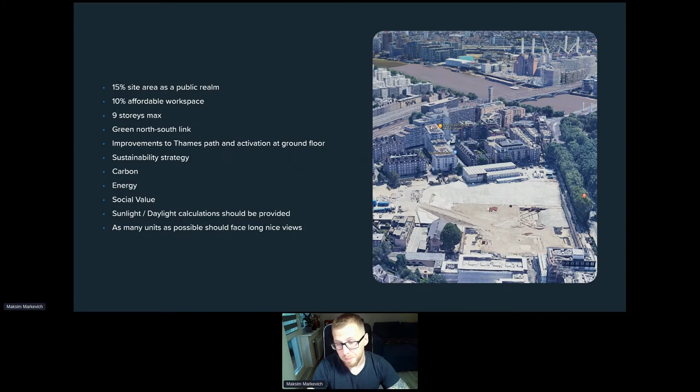The same example here. This is our site. 10% of the site should be affordable. It should be maximum 9 stories. Please build a strategy around social value, sustainability, etc.

Or the third example, again just a new site: please give us 325 residential units with this amount of net internal area. Net-to-gross efficiency should be more than 78%, no more than 5 units per core, etc. So this is how typical brief requirements for architects at the beginning of any project look like.

So here we're going to talk a little bit about what software they use right now to solve these problems. We've broken down this software into 3 different categories, and I'll explain what they are and the difference between them.

The first category is the most obvious one: building design and BIM modeling software, such as Revit, Rhino, ArchiCAD, SketchUp, etc. Everybody knows this kind of software, and the technology they usually use is manual modeling, parametric design, or simple CAD drawings.

Another category is building design automation software. It's not really new, but it's a relatively new software category which usually contains a combination - for example, Dynamo, which works on top of Revit, or Grasshopper, which works on top of Rhino. The technologies or workflows this kind of software uses include computational modeling, generative design, and other algorithms.

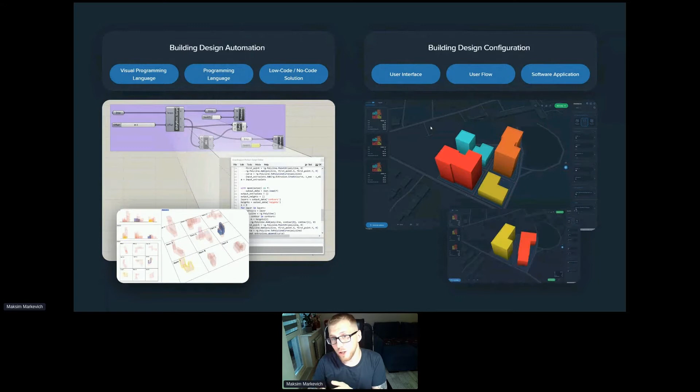Building design configuration software is not such low-level software. It usually has an interface, a specific user flow, and looks like web-based or desktop software where you don't have the flexibility you have in Grasshopper or Dynamo, but you can still do quite a lot of different things. This is the main difference.

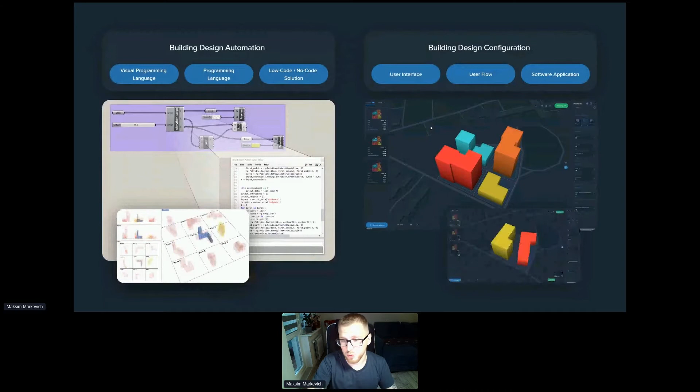And among building design configuration software, there are also quite a few different softwares, and they're really different by the context they cover, by the level of detail they provide, by the level of building informational level, etc. But we'll talk about it a little bit later.

Let's go further. So CREO Module, we will talk a little bit about vision. As you see and as you know already, it's a building design configuration software. So here are quite a few words about our vision.

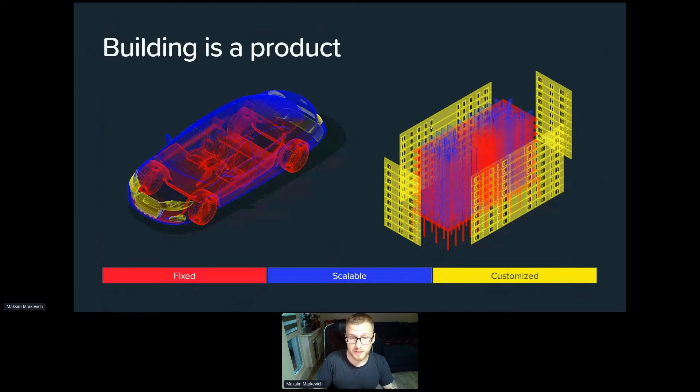We believe that every building should be treated as a product rather than a project. It's very similar to a car, and it also contains fixed, scalable, customized parts, especially if you're talking about different prefab solutions. Obviously the facade can be customized, let's say MEP systems can be scalable or fixed, frame can be fixed, etc.

But it's not like a car, and the main difference is that a building is more contextual than a car. There are quite a few different contexts - one is market context. For example, for a particular region you'll need to provide specific social units, or if the generation of people living in this area is pretty old, say 50-60 years, it will affect the quality and the size and configuration of units you provide for that region. This is what's called market context.

The second context is site context. It's about different setbacks, about listed buildings around your site, about flooding zones, maybe some tubes, maybe some specific conditions, etc.

The third context is planning context - it's about transport, pedestrian ways, sunlight and daylight calculations, etc. And the fourth one is building context - it's about how you stack these units, what building topology, what kit of parts you use, what kind of finishes, what facade materials you use, etc.

Obviously there are a lot of other contexts which are more connected to later stages of the project - for example, logistic context for the construction site, etc. But that will be important a little bit later.

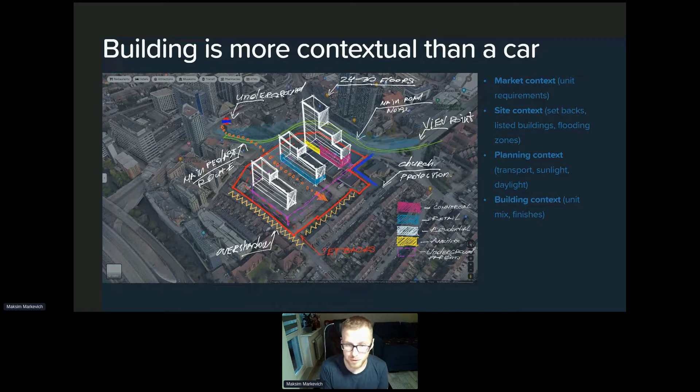So we focused on a building context, and here a little bit about how we define this building concept and the building topology - how we define the building DNA before we do automation of it. We basically divide building DNA into three main sections or three main components.

So the first component is topology - it's about spaces and adjacencies. For example, when you have a residential building, it's about units, corridors, lift halls, and how all these spaces are connected. When we talk about parking, it's about stalls, ramp space, drive aisle, etc. So it's a different topology, and inside residential buildings there can be hundreds, thousands, millions of different topologies.

The second part is design guidelines - how these spaces and adjacencies create the main function of the building. It's about different nuances, requirements to spans, requirements to fire safety rules, requirements to daylight and sunlight calculations, etc. And the third component is a kit of parts.

It's about walls, doors, windows. It can be different construction methods for the particular building. It can be volumetric modules or panelized systems, or it can be just components like usual columns, beams, or wooden frames, etc. So basically, for ourselves, we define that a building concept is defined by these three main things.

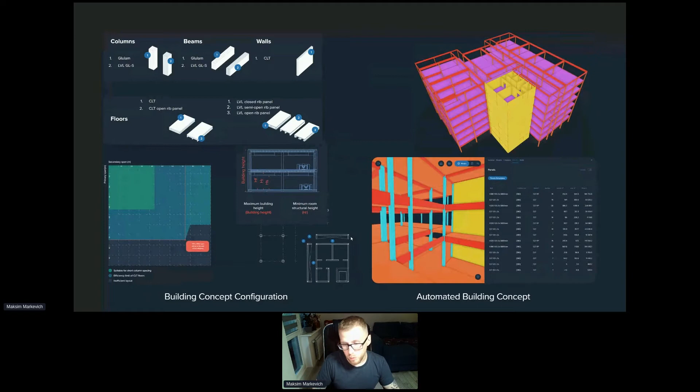So we build a flow which actually takes into account all these requirements, all these three components from the previous slide. And then such a building, like you see from the right side of my screen, can be generated in a few minutes with all materials, with all elements, with bill of quantities, really quickly. Okay, so this is the first example.

Another example is our volumetric modular residential buildings configurator. Same story - it's just kit of parts, modules, adjacencies and topologies about how these modules connect together into units. And it's not only about horizontal direction, it's also about vertical direction.

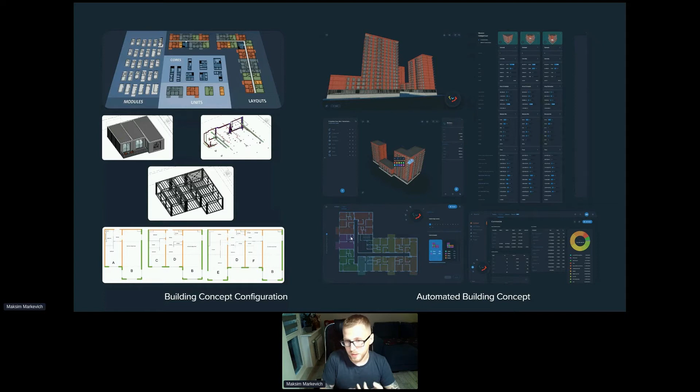As you see here, a module can contain not only an architectural part, but also MEP part, structural part, which basically means you cannot put any module on top of any module - you need to respect some rules. And the same story - so we choose this concept, we do automation, and then our users can generate 3D models with dashboards, analytics information, etc.

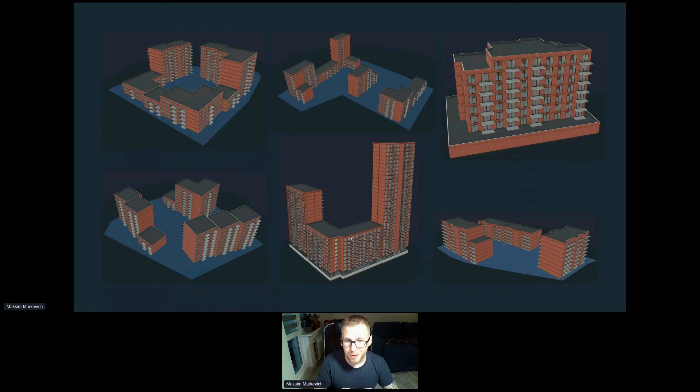So again, just a few more pictures to explain what building concept means. For example, all these buildings are entities of one building concept. But I mean, it looks like that - they all have different, they all have the same facades, quite similar configurations, but it's not only about facades.

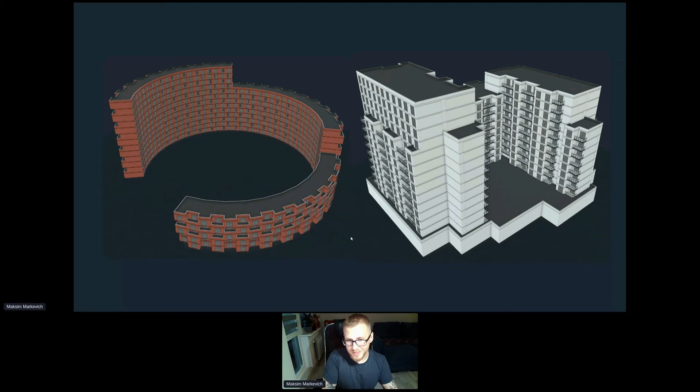One building concept can have completely different facades, completely different colors, completely different textures, different materials, if it was taken into account when it was created. So again, these building models are also models from one building concept. And one more point - it's even not only about the architectural part of the building, because building concept can also contain a structural or MEP part.

And also the last point, which is also very crucial, is about different inputs. So when a user generates a building, we for example can work in a way in which an architect can create masses - like a massing for the building - and then we fulfill this massing with the buildable parts, taking into account building concept definitions, topology, kit of parts, guidelines.

Also, recently we built a solution which allows us - we use the technology from our other product, DTakeoff - and we built a solution where users can upload a floor plan, like a PDF floor plan. We do recognition of this floor plan.

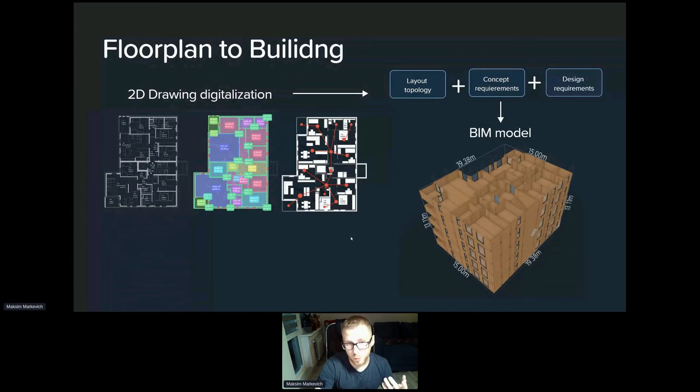We define spaces, we define units, we define corridors, and then we use specific kit of parts from one manufacturer, and we just fulfill this floor plan with this kit of parts. It changes the floor plan a bit, but still it makes perfect sense for our client. And it's just one example with a completely different input - so as you see here is just a massing to build in, and here is like a floor plan to build in.

Here's the main question: why do we need automation of building concepts? The answer is pretty simple, actually. We all know about the housing crisis, and we all know there are a lot of building types that just need to be built.

So it's not about unique and bizarre projects. It's about residential buildings or hospitals, which actually have pretty the same topology, pretty the same kit of parts, depending on the country, etc. Such building concepts sometimes need to be built much faster, and the best way to improve the design phase and pre-construction phase of the building is to define this building concept and to do automation of it.

The next question I want to emphasize is which building concepts we should automate. Obviously, all unique and bizarre projects should be kept as projects for architects, where they can spend more time doing nice calculations, planning, using their imagination, solving problems for specific difficult sites. But for the most usual, repeatable buildings with simple, obvious purposes, we assume architects will work to create these building concepts.

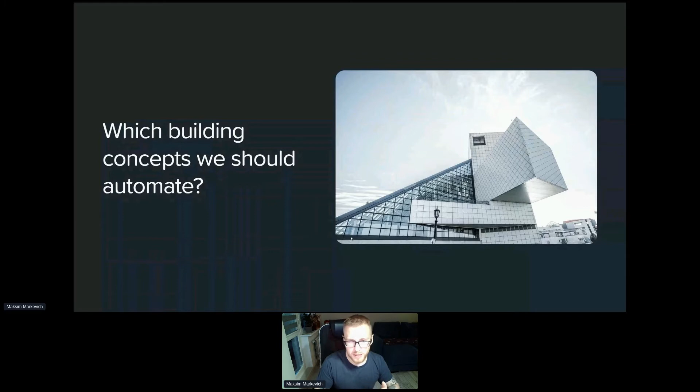We, at our company, believe that architects should create the concepts. They should transfer their knowledge in a proper way. Building concept automation can be done by specific professionals in this industry. I'm not talking about playing with Grasshopper to create a fun or cool facade, I'm talking about the whole building concept automation.

So that was a quick explanation about what we do and what we believe in. Now I just want to show you how one of our automated building concepts, or automated building solutions, looks like. I'll show you our parking example just very quickly, to explain how it works.

And actually, it's relatively easy. Let's just create a project together, somewhere near my place. We're going to generate a parking model. But before that, we need to draw the site boundaries. Let's say I want to draw these kind of site boundaries, and create this site, then I'll just turn on the auto generation function.

This function will allow our algorithms to generate quite a few options for this particular site. In each of these options, you can immediately see some metrics which will help you choose the best one: total number of stalls, square feet per stall, building height, site area, stall mix, etc.

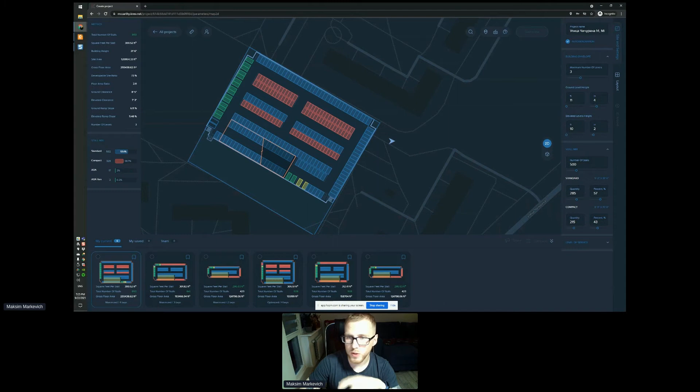And here we can adjust this layout. As you see, this layout is created for different floors. So here we can move stuff, like we can move the entry, we can move the ramp, and anytime we move something, the layout is being recalculated. Then we can easily save it.

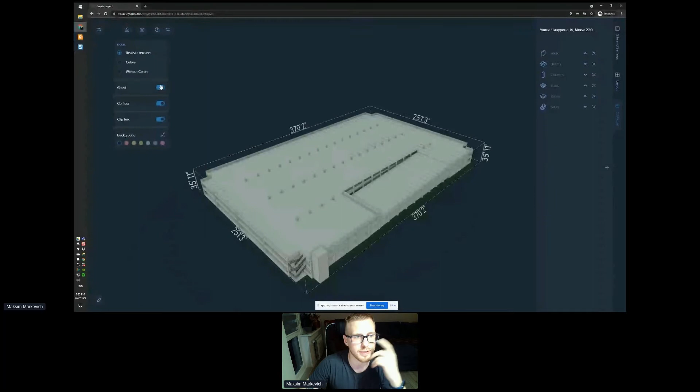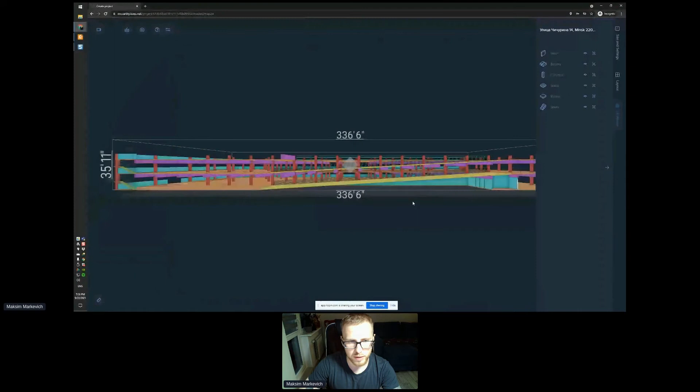And then we can go and see a 3D model, let's say like this one. In this 3D model, obviously, you have stairs, you have a lift configuration, you have your ramp, you have different stalls. We can do different cross sections, so we can see how our building model looks from different sides. So we can say, okay, let's see what we have about beams.

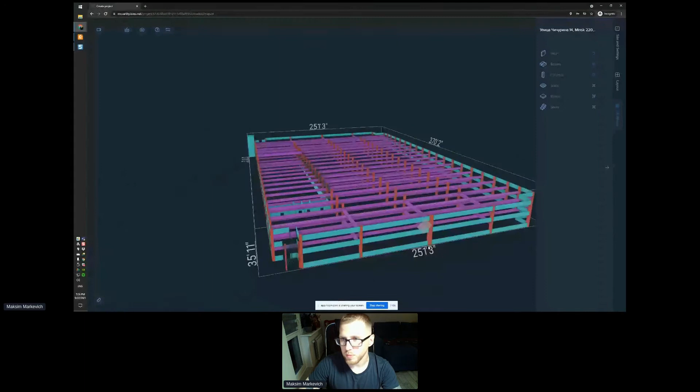We can choose columns, slabs, ramps, walls. Obviously some beams and parapets were created as walls, but that's just a matter of what was decided. So we have stairs, and we have information about all these elements, so we can generate bill of quantities relatively quickly.

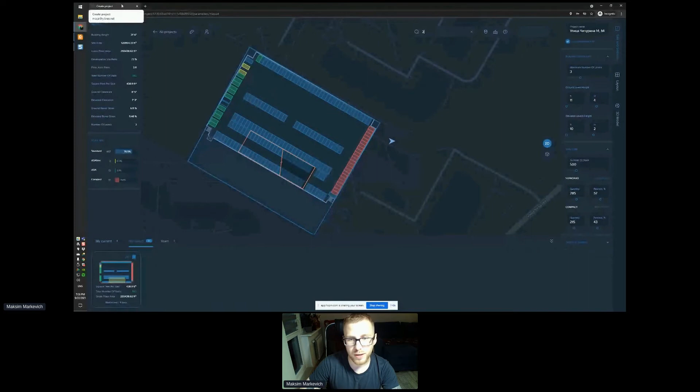And if something's wrong or you want to change something, you can go back, regenerate your site, create any additional options, and just evaluate your design initial layouts quicker. So, another example, just to quickly show you our CREO Module solution, to explain how different it can be.

Our default solution is actually CREO Module, and we use it as a tool for mass market, but we still do quite a lot of bespoke customizations, like I showed you at parking. In the CREO Module, everything is relatively simple. We have a preset of different modules connected in simple units, and these units create quite a few layouts. Each layout is just a set of different units connected with corridors, so you can change them in the way you want.

Once your module presets are created, you can go and create a project, a new project. Here we need to choose which preset we want to use, because for different building types we can use different presets. And then we just need to create site boundaries.

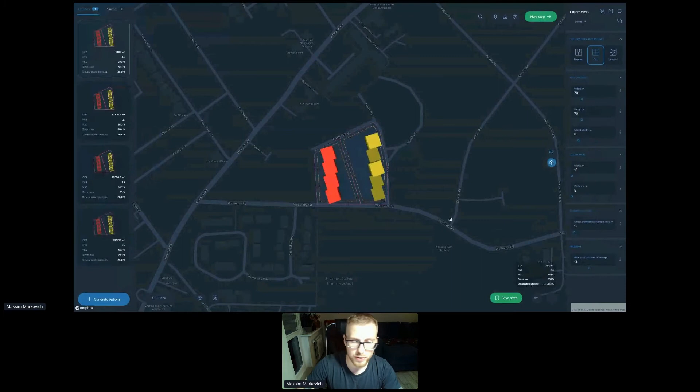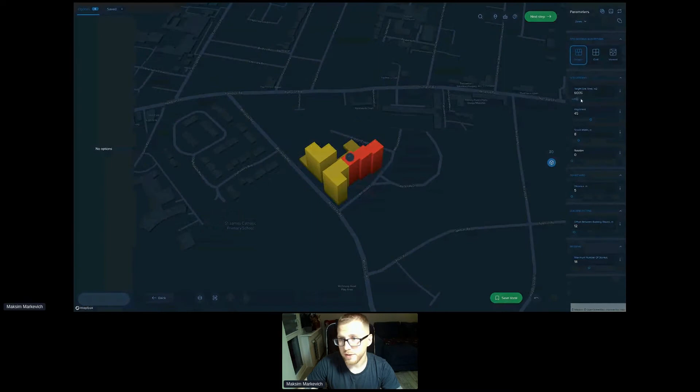Let's say we want to create a project somewhere here, and then our software will generate different options for this particular site. We can customize and change parameters from the right side of the screen - target site area, different site dividing algorithms, how many buildings we want on this particular site, and manage the offset, the distance between buildings, and the street widths.

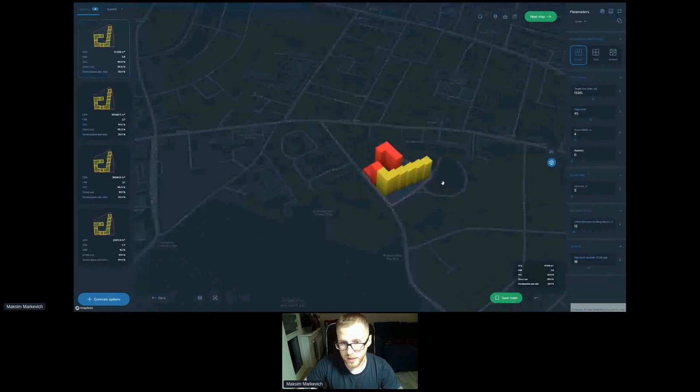As you see here, I can change it and get something like this. So again, if you want to see just one big building, we just need to increase site area. When we tie these parameters together, we can simply generate a lot of different options. And for all these options, we have metrics created specifically to choose the best ones, for example gross floor area or floor area ratio, vertical sky component, direct sun, etc.

So we can go through these options, and we can save quite a few of them. Actually, the way these blocks are connected is defined in our preset, so we can choose which layout can be connected to which one, and by which rule. It's quite customizable. Let's say we choose a few options.

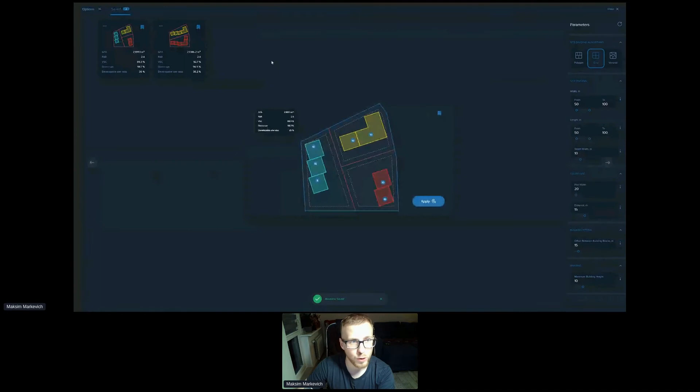We can go and compare these options - compare this one, just to see the difference. Then we can apply and generate a building project, which will be calculated in a few minutes, less than a minute actually. This particular one is small, so we can do it together.

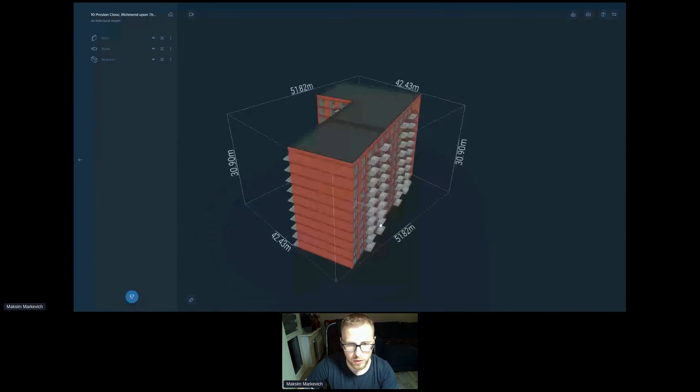As you see, all buildings are already being generated, and now the site is generating while it's spinning. We can go into building number 1, jump into the architectural model, and see how it looks. It was a volumetric modular solution.

This is why we can see that the building contains different modules - we can see different units here. For example, this is a 2-bedroom apartment, this is a 1-bedroom apartment, this is the corridor, and this is the core configuration.

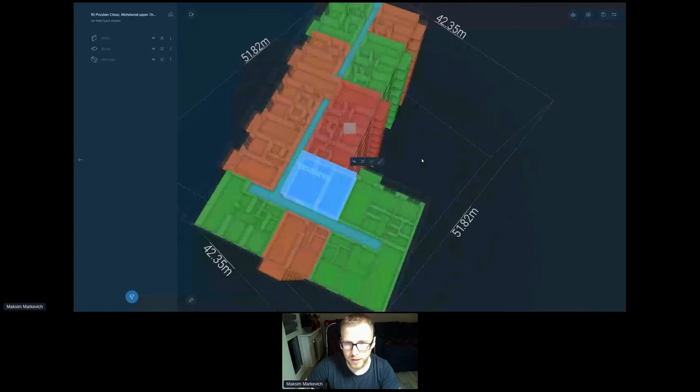If we go back, let's go back to the site. On the site, obviously, we can see the whole site. Again, we can play with the 3D model, do different cross sections, different views.

But at the same time, we can go into our analytics where we can see unit mix summary, total cost, area schedule summary, and we can dive deeper into any of these buildings. For example, we can dive into this building and we will see the elemental summary, which is about cost.

Basically what we do is extract a lot of parameters from the building, and then we can connect cost benchmarks to these parameters. This is how we can calculate things in a quite advanced way - we can calculate concrete or any works, wall finishes, internal doors, because we have a number of doors, and the customer can say, okay, this is the cost of each door.

We can calculate stuff not only by actual metrics, but also apply MEP-style rules. For example, this model doesn't have any MEP stuff, so we just apply it to gross internal area and say each square meter costs this amount of money. That's it. This is also how we calculate modular cost and on-cost, PCSA fees, preliminaries, etc.

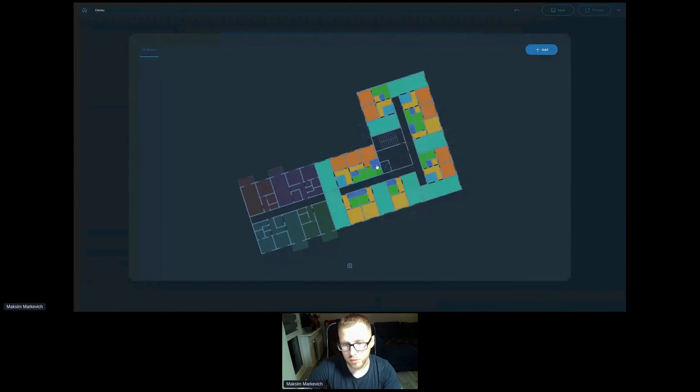So I can create two columns. In the left one I'll put my architectural model, so I can edit it and choose the view I want to see. In the right one I want to put a floor plan or any piece of my floor plan. I can add this and see the schematic floor plan for this particular block. Then I can put some charts, like a table, unit mix summary, area schedule summary, or total cost.

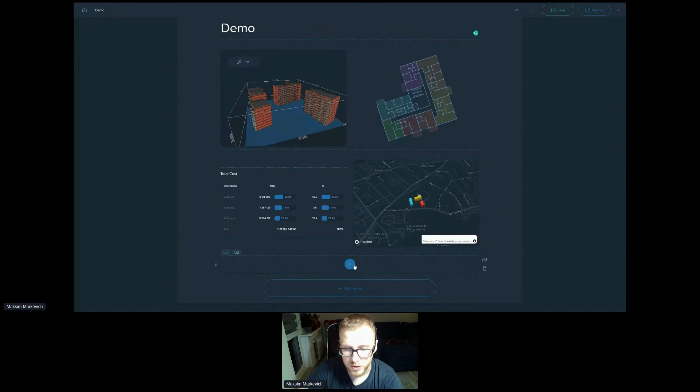Here, for example, we can put a 3D map, and also create a specific embed code. Let's say if we go to Google Maps, somewhere here, let's go probably to London, and put this guy somewhere here. Right, it's not the right place to build a building, but anyway.

So I'm going to just copy this HTML. I can embed this HTML here, and actually our client will be able to see the surroundings where it's being built, and quite a lot of other information. So you can save this report, you can send this URL to the client, and yeah, this is how it works.

So returning back, just want to summarize. As you see, it's all about building concepts automation, and we have our default solution which we sell for the mass market, trying to make it perfect right now for architects. And we have quite a few bespoke customizations which we do for different clients, for manufacturers and contractors. Yeah, that's pretty much it.